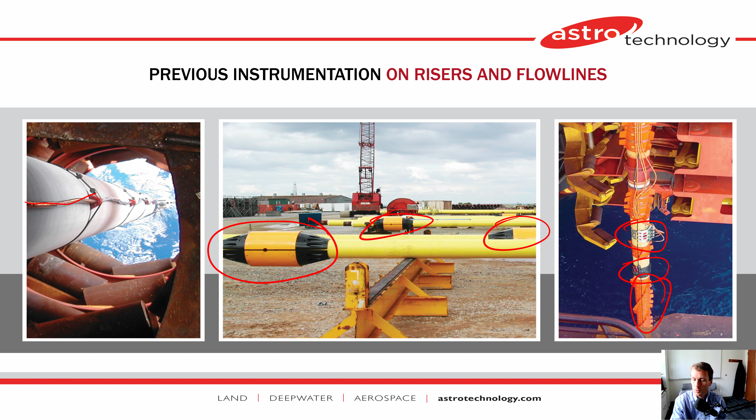Here are some of the previous applications, instrumentations on risers and flow lines. You can see the strakes here, and then a sensor station that was applied. Right down here is a sensor station where fiber optic sensors were used to monitor these risers and be able to monitor things like vortex-induced vibration. You can see also here some clamshells that are put on during the pipe lay procedure to not damage the fiber optic installation and the sensor clamps that are placed on it. You can see a few of those right here, and also a fiber optic cable as it descends here.

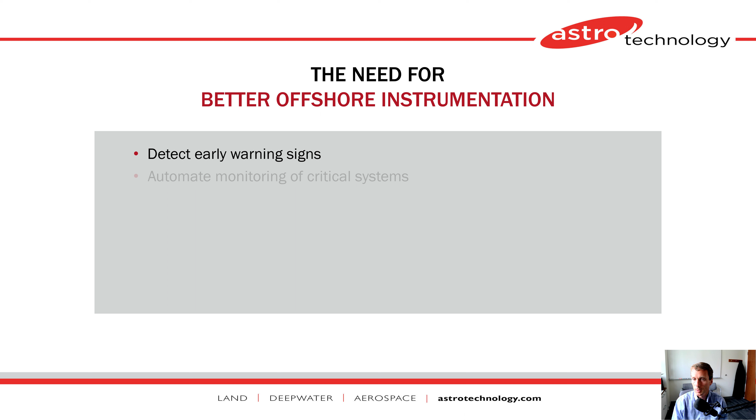So there's a better need for instrumentation. We want to be able to detect early warning signs of fatigue or failure. Also in flow lines, be able to detect things like plugging, fouling, and monitor flow lines in real time, and automate the monitoring of these critical systems. We want to be able to track pressure, temperature, strain, and flow, and do all of that with these non-electrical fiber optic sensors. Also be able to give critical data for key decision makers.

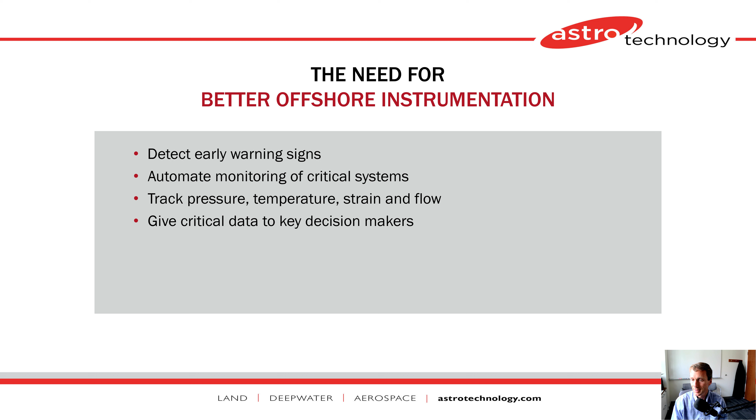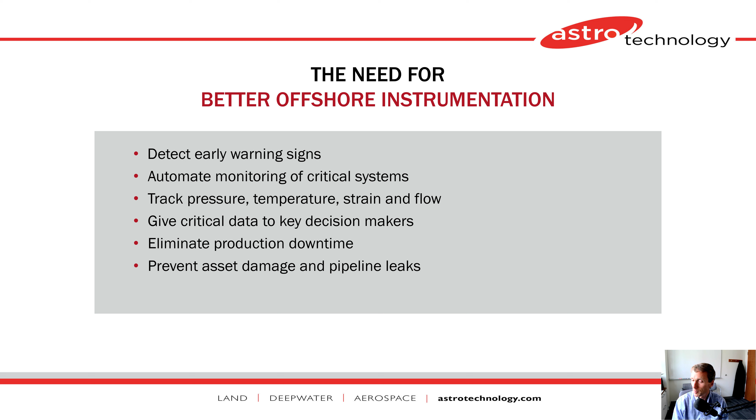So we want to talk about this specific application that we've developed with this tension leg platform. This is in the Gulf of Mexico on the Neptune Platform, which was owned by BHP, but now by EnVen and then Talos now.

There are load cells that monitor the tendon tension, and these are built into the original design of the TLP platform. The load cells, however, are failing just due to water ingress and other issues with the aging of these load cells used to estimate or measure tendon tension.

So the approach was novel. This was to monitor the tendon tensions, not sending divers or ROVs into the water, but to install these sensors on the internal of the hull. Be able to do a dry install on the web frame of the pontoons of this platform and determine if we can estimate the tendon tensions.

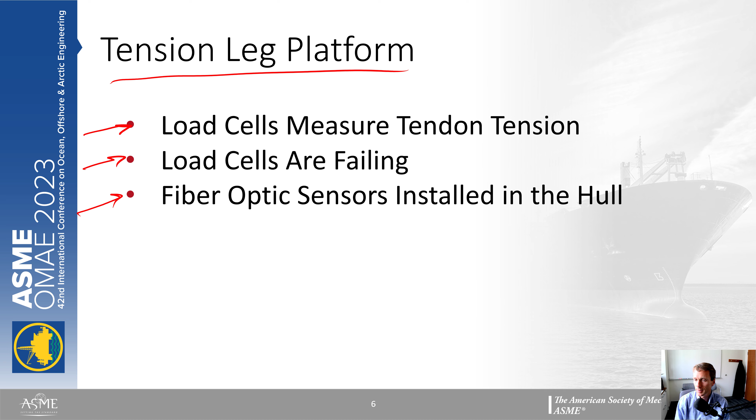So I'll talk a little bit about the system environment, a little bit about the preparation that we made to prepare the web frames for this installation, a little bit more about the installation itself, some sensor selection, and then model training and performance.

So let's first of all talk about the system environment. Here is a photograph of the Neptune platform. It has these three pontoons, and it's a tension leg platform. So there are tendons, two at each of these, that then descend down to the seafloor and attach, and being able to maintain the tendon tensions is critical.

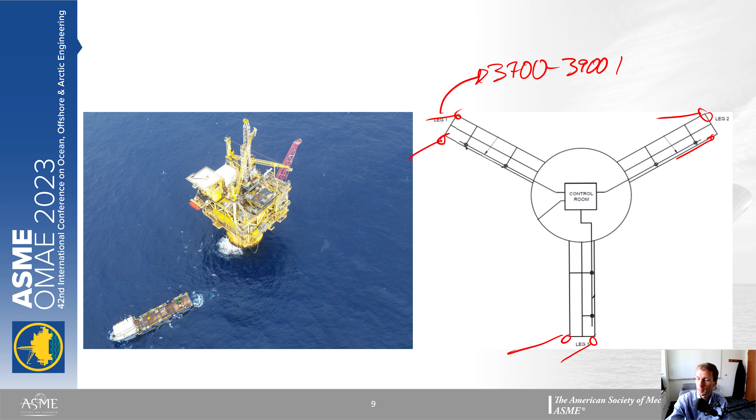Somewhere between 3,700 to 3,900 kips, in that range, for each of these tendon tensions. We want to be able to route these signals back up to the control room for the operator to be able to monitor the tendon tensions.

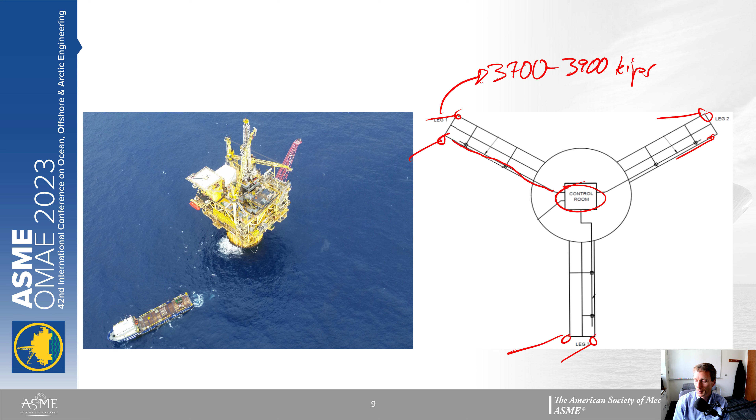So here's just an overview of the TLP design. Here you can see the tip tank, and over here is right at the very end. You can see the walkway here, and you can see these web frames that come down, which provide stiffness for these pontoons to be able to support the stresses induced by the platform.

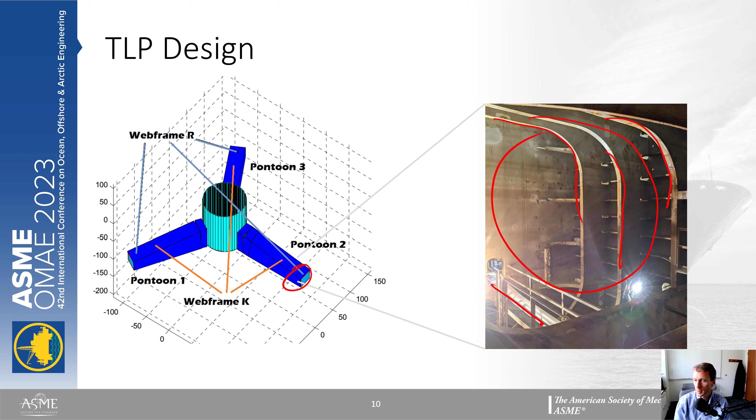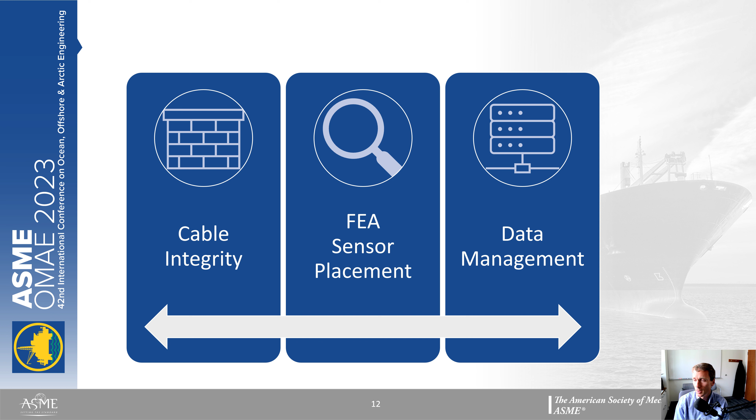Okay, so some of the preparation. We had to first do the cable integrity and make sure that as we pass through these bulkheads, we maintain watertight integrity. We also did an FEA sensor placement, finite element analysis, to determine the most sensitive place on the web frames to install these sensors. And then there's the data management as well. We had about 1 terabyte of data coming in each year, so how do we use that data to both calibrate and monitor the system in real time?

So first, the ruggedized fiber optic cabling. This is the cutaway of the fiber optic cable as it goes through the bulkhead. All of this is armored cable with the fiber optic sensor coming through the center, with a polymer jacket and this ruggedization to allow just the signal to come through right here through the center.

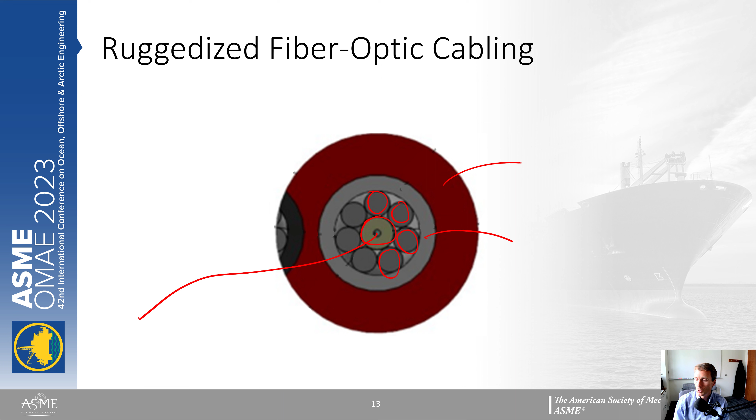Okay, now let's talk about where we placed the sensors. We did a finite element analysis thanks to Wolfstar. They provided the service to detect, as tendon tensions change in simulation, where the stresses are induced in this web frame. You can see a little bit of the meshing they used for this simulation to determine the sensor location. You can see a block of sensors, and then some up here as well.

This is specifically where they were placed, with the wavelength we used. This was a 1480 to 1620 nanometer swept laser fiber optic interrogator, sampling at 1,000 hertz to detect the signals. We had to downsample it, averaged down to about 10 hertz, because that's all the operator really needed, and then they were looking at 20-minute averages on top of that.

So real-time data collection and analysis with these sensor placements. Now, we used a couple different web frames. This one was in the tip tank, but we also had one a little further back in the web frame, in the dry part. This was the wet bulkhead, and during normal operations, ballast water is placed in there to balance and maintain tension on the tendons. So we had some sensors installed in this area, but also in a dry bulkhead further back in the pontoon.

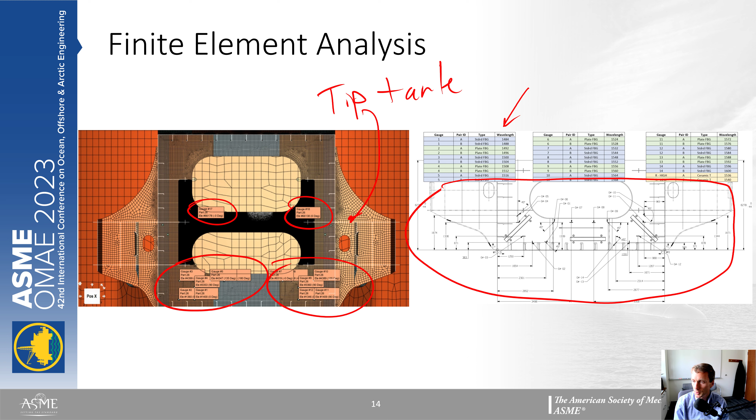So this was a little bit more about the data sampling. We had one fiber optic interrogator that sampled at 5,000 hertz, and another at 1,000 hertz. We used the one with 1,000 hertz in the end. We wanted to save just at 10 hertz, downsampled from that, and transferred the data by Modbus to the control system. We could have used OPC-UA or some of the more modern standards, but the existing platform needed Modbus for this.

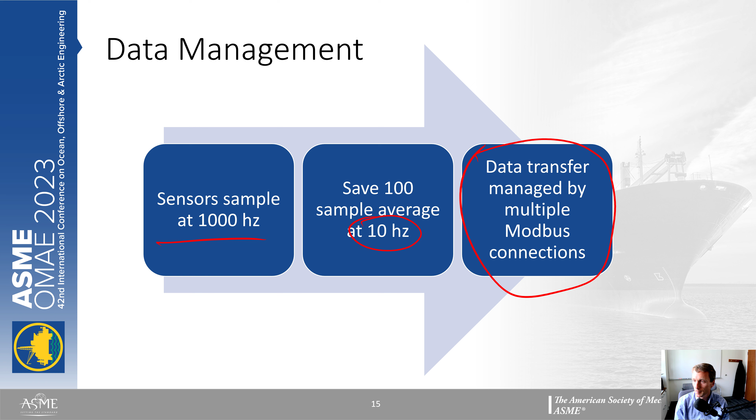So a little bit about the installation. We had some surface preparation that we did in the initial part of it, and we learned a lot from that initial installation, then came back and did a subsequent installation with additional sensors. One of the things that was critical was relative humidity control during installation, to have a dry environment, especially in that tip tank where ballast water had just recently been removed, making it a very damp environment.

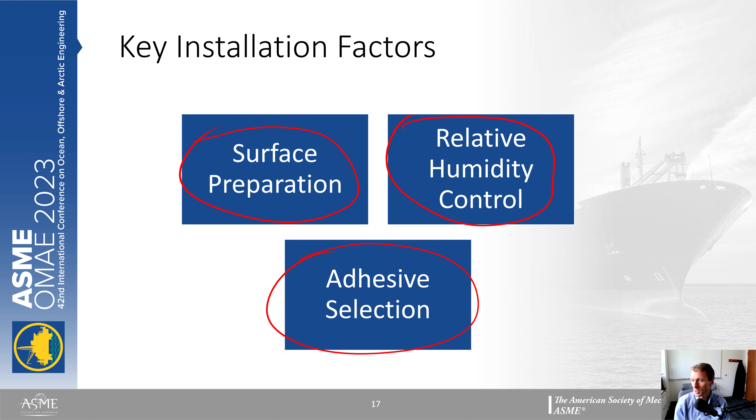Being able to control that humidity, and some of the methods we used were really critical. Also, adhesive selection and passivation of any corrosion were also very important in this project.

Here you can see the surface preparation. Some of the remaining ballast water was placed in these bags just to be able to pump out those last few inches of water. You can see that the surface was ground down to bare metal here to remove some of the coatings.

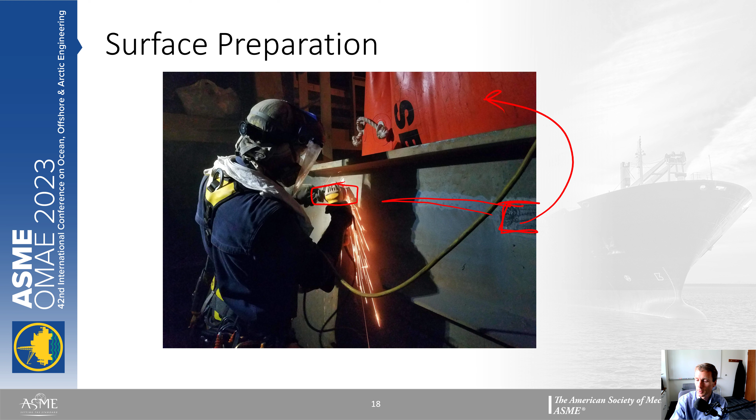And then this was for the cable routing. And then this would be another sensor station here that they are preparing.

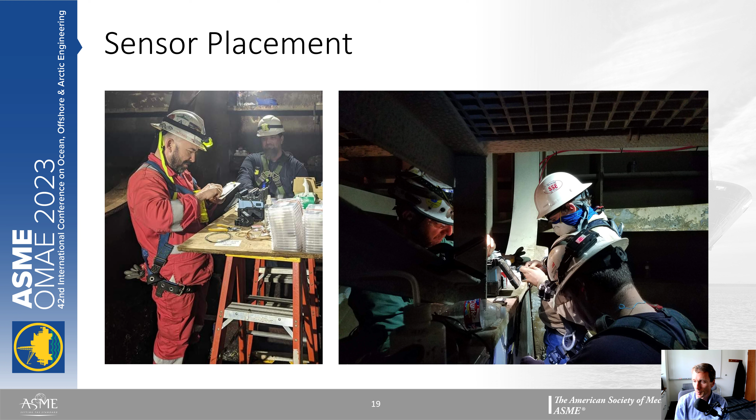Okay, so here's the finished part of it. In the wet bulkhead, there's going to be sloshing with a partially filled area, and with the platform tilting due to wave action and currents, there's also wave action inside of this wet tip tank. So we had to ruggedize this.

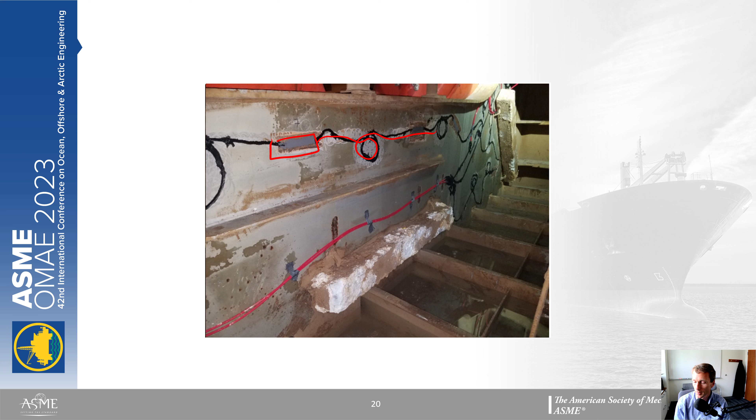Here you can see the sensor installation, and then here the cable routing, just adhesive to this web frame so that the fiber optic cable does not move.

Okay, sensor selection. Now I mentioned the first installation that we did, internal hull sensors, and this is pontoon 1. We placed 12 in the dry, and then 14 in the wet, in the R web frame versus the K web frame. There you can see the different pontoons and the counts on those.

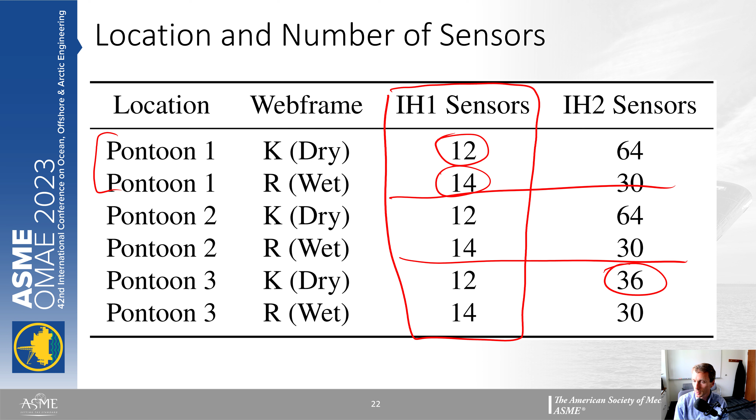Now this one we did fewer sensors. We just ran out of time for the project. We could go back and install additional ones, but we actually found that we were able to get acceptable performance just from the 36 sensors that were placed on that one.

All right, so we need to also take a look at temperature compensation. This is a really critical thing with fiber optic sensors, being able to calibrate and remove the effect of temperature.

We had some specific temperature sensors placed at strategic locations below and above the water line for the ballast water, to be able to detect the differences in temperature and monitor that throughout the year. So here you can see 2021 from July all the way to 2022 to November, and you can see an annual cycle of the temperature during the winter months versus the summer months.

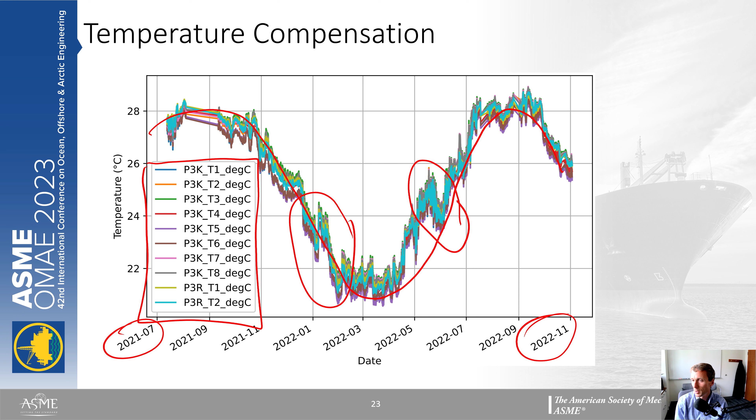So we had all of these sensors. They agreed fairly well in terms of the overall seasonal variation of the temperature. And you can also see sometimes where it doesn't follow that sinusoidal expected value, due to things like loop currents or other things that bring warmer or colder water into the Gulf of Mexico.

All right, then we had so many sensors that we wanted to rank their importance. We had done this finite element analysis to determine what we thought were going to be the most important sensors. But then, once we had the data, we could also use a method of selecting the best sensors with a chi-squared statistic to tell us how the features, the inputs to our model, related to the outputs, or things we were trying to predict, which were the tendon tensions.

You could see certain sensors ranked higher than others, and some of them were much lower. So we used this feature importance to be able to eliminate some of the sensors, because any one of these sensors that goes bad could affect the entire correlation. So we wanted to reduce the dependence on just many sensors on the platform.

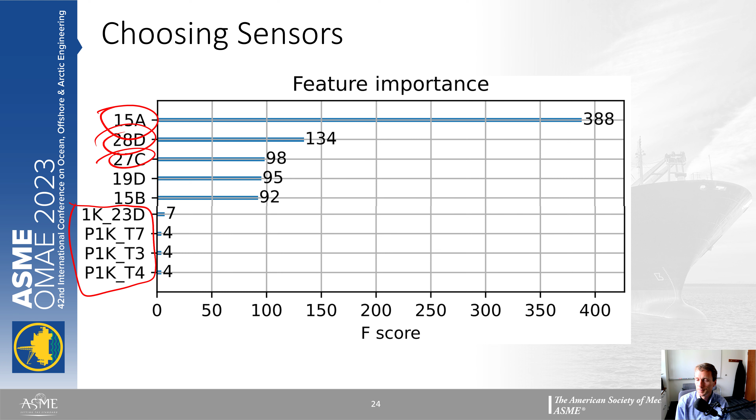Okay, so now model calibration and performance. We had about 1 terabyte of data per year that we were collecting with this. We wanted to make sure that we could calibrate to the existing load cell sensors.

One of the things we saw is that some methods for linear regression perform better than others in terms of scaling up as the number of data samples goes up to 1 million, tens of millions, or 100 million. Different Python packages are listed here. Nonlinear packages like Keras and TensorFlow do not scale as well, but you can parallelize them and spread them out over many GPUs, especially for a neural network or other nonlinear regression. So those are the PyTorch, Keras, TensorFlow models, and as you can see, they are all in this region right here.

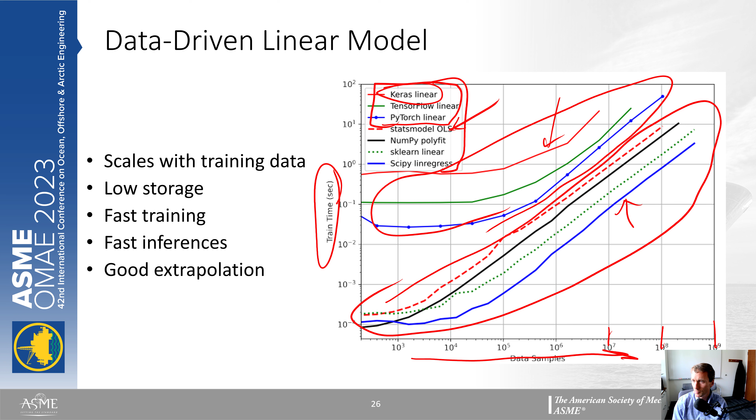Then you get down to the linear regression methods, and you can see SciPy's linear regress was the fastest. Now, statsmodel OLS gives you more summary statistics, helping calculate things like p-values and other regression-related values. So we also liked using that one, even though it was a little slower.

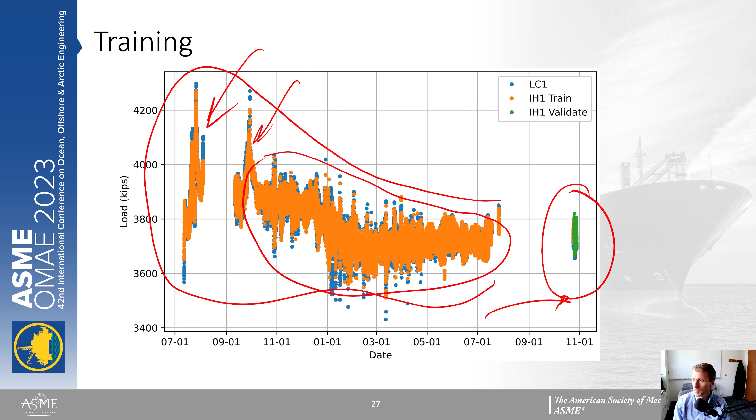In the end, we used linear regression to relate the strain peak values to the tendon tensions, and here are some of the results. Here you can see the training period, these are some ballast movements, and then this is normal operation. You can see a validation period a couple months later, where we took some data, and we've increased the amount of validation data even more as we've collected it. Just for the purposes of the publication, these are the results we had at time of publication, but excellent results in terms of fitting to the model and long-term stability of these sensors.

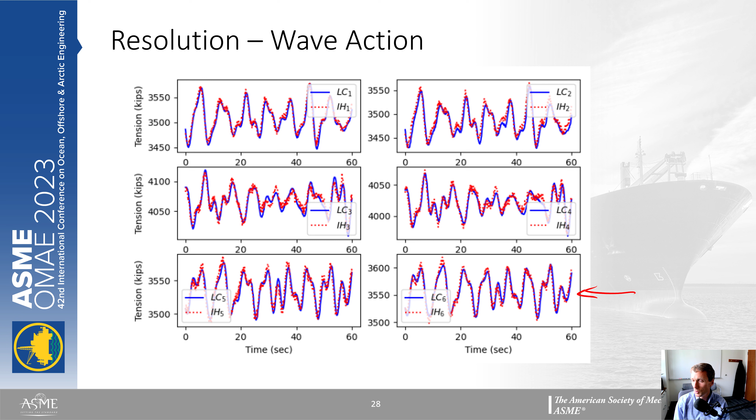So, key takeaways: we have internal measurements that relate to external conditions. We're able to measure something in a dry bulkhead of this pontoon to estimate the tendon tensions without sending divers or ROVs into the water to install sensors directly on the tendons. There's high sensitivity, seen with the wave action and tide cycles, and also over a longer period of time, over a year, with training and validation. There's low error — we needed plus or minus about 1% error to satisfy the requirements for monitoring tendon tensions.

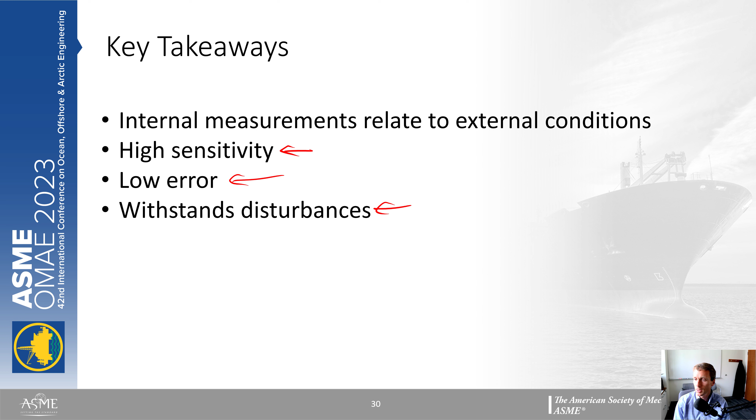It's also able to withstand disturbances, especially because we had so many sensors installed, giving us a lot of redundancy. We had to down-select some of the sensors to use just a subset, and that was sufficient to maintain accuracy.

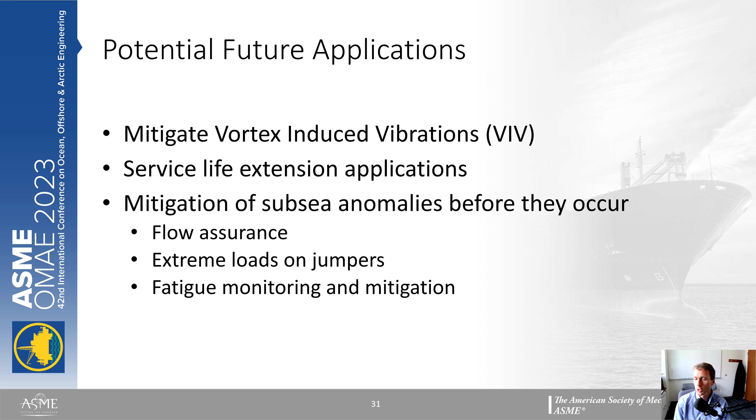Potential future applications include mitigating vortex-induced vibrations, or VIV. There are also service life extension applications for risers, where we can monitor and also repair fatigue in the riser, as well as mitigation of subsea anomalies before they occur, for example flow assurance. We've done other flow assurance applications, extreme load on jumpers, and fatigue monitoring and mitigation.